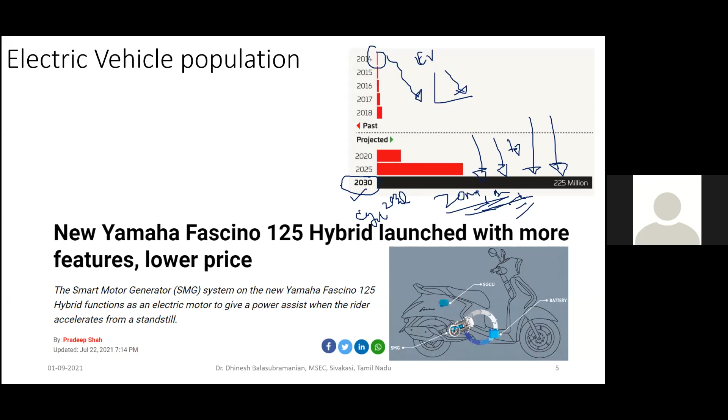Talking about electric population, in the year 2010 most of the vehicles in India was dominated by only purely internal combustion engine. So it was only internal combustion engine ruling the time scale of 2010.

But as the years kept increasing, the role of internal combustion engine slowly started to lose its market space in the overall two-wheeler and four-wheeler sectors. Particularly by the year end of 2020 or later, the slope would face a drastic change after this time scale.

So after this, only the internal combustion engine will be replaced by the term HV or PHEV. HV stands for hybrid vehicle, whereas PHEV stands for plug-in hybrid vehicle.

So by the year 2021 or later, you can see the internal combustion engine will only be alive by the term HV or PHEV. So we will discuss more about these two terms in the upcoming slides.

Agreeing well with this profile pattern, the new Yamaha Fascino 125 Hybrid was launched with more features and lower cost. This was the news on July 22, 2021, not too far from today's date. Earlier it was a purely internal combustion engine based two-wheeler, mainly making use of petrol for its propulsion, but they have come up with a new term and tried to add 'hybrid' to this vehicle, claiming it is a hybrid vehicle variant of the existing model.

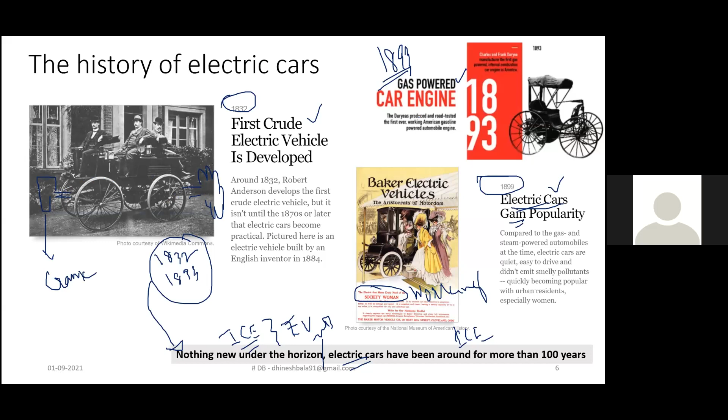If you think about the internal combustion engine at that time scale, you needed to have a crank in the front, and whatever emission emitted from the rear side would be enormously high. So society women or working women highly preferred electric cars rather than internal combustion engines at that point of time.

Later on, in 1901, Edison took on the electric vehicle with batteries. So now people are discussing Tata Nexon with an electric vehicle or pure EV, but the electric vehicle with batteries was introduced in the time scale of the earlier 20th century.

It was in 1901, but as of now we are in 2021. So think about the time scale - for nearly 120 years, people were only discussing the internal combustion engine.

It was in 1901 that the first hybrid electric cars were introduced. As discussed in the previous slide, Fascino has come up with the statement that they are just coming up with a hybrid vehicle variant by 2021, but the hybrid vehicle was introduced to mankind at the time scale of 1901.

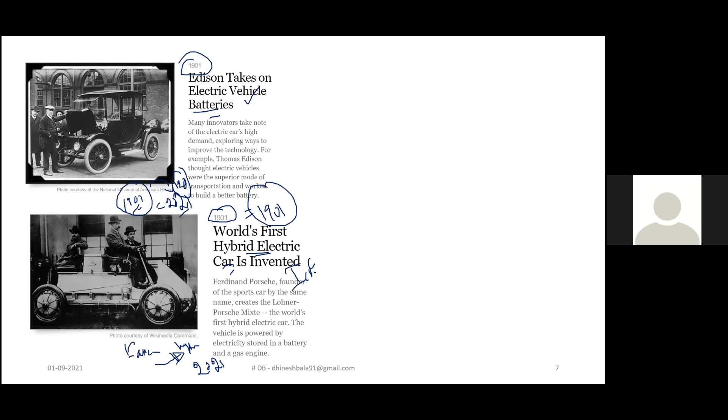So for the past 100 years, only the internal combustion engine was ruling the entire automotive market field. It was from 1920 to 1935 that the electric vehicle slowly started to fail to take a place in the automotive market share. The one main reason people addressed at that point of time was the charging station facility and the overall weight of the system.

The overall weight of the system at that time, talking about the battery, was enormously high, and the charging time and the amount of power that could be drained from the battery was not sufficient to make long travel, particularly for transportation. This made the role of electric vehicles in the automotive share slowly disappear entirely. This happened in the time scale of 1920 to 1935.

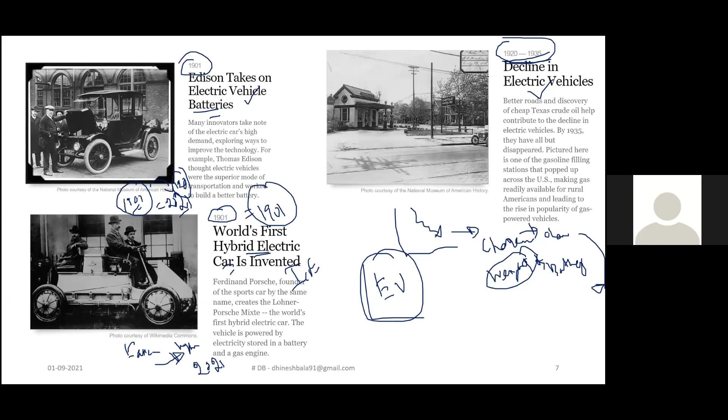But once again, electric vehicles started to make a small role in the automotive share, particularly in the time scale of 1968 to 1973. This happened because gas prices started to rise to a drastic extent. The dependency on gas price, or the dependency on fuel, was focused on one particular nation rather than having multiple supply points.

This made gas one major threat to the entire automotive field, particularly the internal combustion engine. The dependency of gas focusing on one particular nation made an issue with the ruling nation at that time. So, as the gas price kept increasing and the dependency on one particular nation continued, this paved a pathway for researchers all over the world to think of an alternate source of energy rather than relying on gas as the main energy source.

This was well assured in 1971 as the electric vehicle was once again in the newspaper and in the air, as the NASA lunar rover was propelled with an electricity-based vehicle at that time. This news sparked among all the automotive manufacturers to think of making use of electricity as an alternate energy source rather than relying on existing petrol and gas.

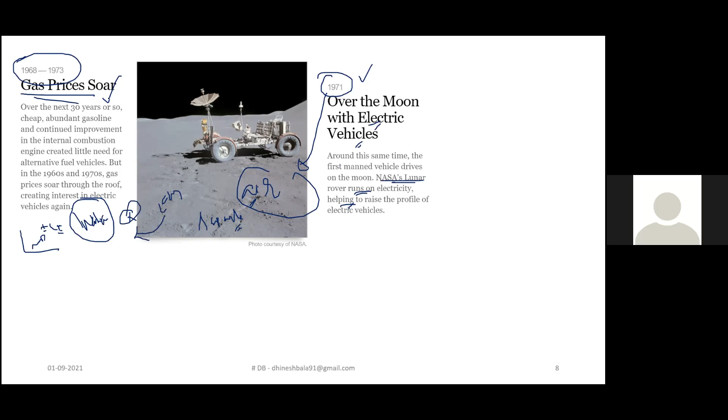It was also well assured by 1973 that the next generation electric vehicle prototype was introduced to mankind. General Motors developed a prototype for an urban electric car, and it was displayed in a symposium where most automotive manufacturers gathered, the symposium of low pollution power systems, in 1973.

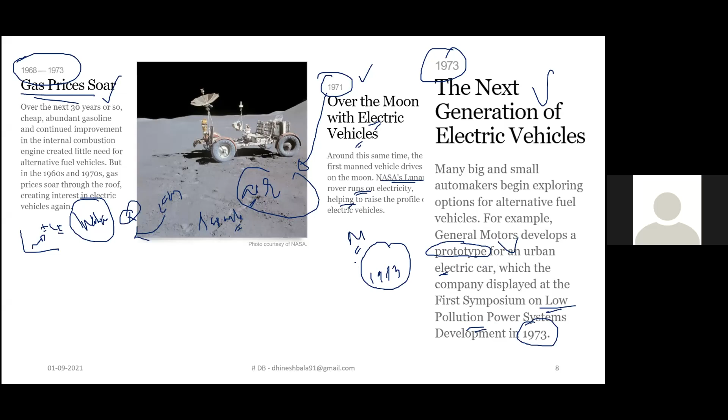Once again, the electric vehicle started to emerge in the mid-1970s, and the first hybrid vehicle was introduced to mankind. The invention of the hybrid vehicle was in 1901, and it was in 2000 where Toyota Prius came up with the first mass production of a hybrid vehicle.

For the past 100 years, people were relying purely on internal combustion engines propelled by either petrol or diesel as an energy source. And here comes the hero of our current electric vehicle era: in 2006, the Silicon Valley based startup entered the automotive market, making automotive manufacturers want to have their own electric vehicle once this statement was out.

Tesla was initially a Silicon Valley based startup. They announced that they would produce a luxury electric sports car with a range of 200 plus miles. This was far-fetched at that time, and it made a threat to most automotive manufacturers, who then accelerated their efforts to work on their own electric vehicles.

This particular year marked when the role of electric vehicles slowly started to gain penetration in the overall automotive makers' share percentage worldwide. And this covers the history of the electric vehicle.

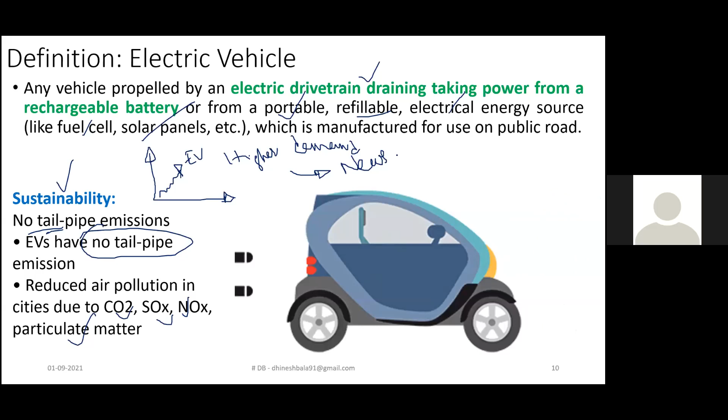This would result in higher demand in electricity, and sooner or later you might get news stating that the government would announce much more incentives for installing solar stations on the rooftops of your houses. To handle this electricity demand, the government should rely on an alternate energy source, because whatever electricity is produced as of now is handled by power plants, either thermal or any other power plant. So once electric vehicle penetration increases, this would put an enormous pressure on the demand for electricity.

So all put together, it would have a great impact on the power plant to produce excess electricity. And for producing excess electricity, once again, you should rely on fossil fuel. So talking about no tailpipe emission, it should be addressed with one particular term along with it: no tailpipe emission from the user end. Once electric vehicle penetration has increased, whatever emission comes from your particular vehicle would be restricted.

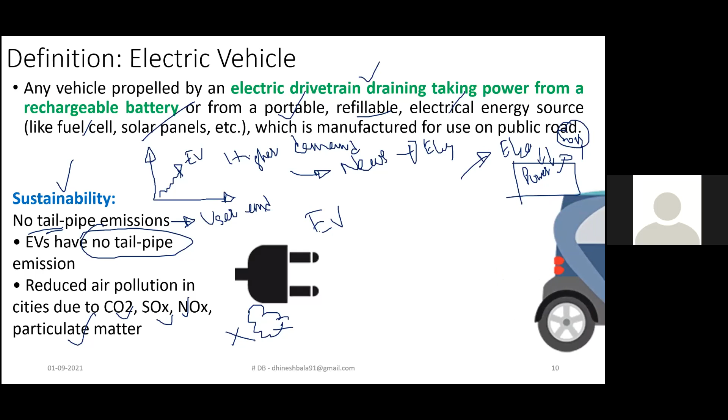But to handle this electricity demand, the thermal power plant should run for an excess time and handle the overall demand. So the fossil fuel supply to the thermal power plant would increase, and the thermal power plant would emit excess emission, whereas the vehicle used by yourself won't emit emission. So it doesn't mean that switching over to an electric vehicle would completely cut away the emission. Emission from the user end would be cut down to the maximum percentage, but the emission from the thermal power plant would be enhanced to a higher level.

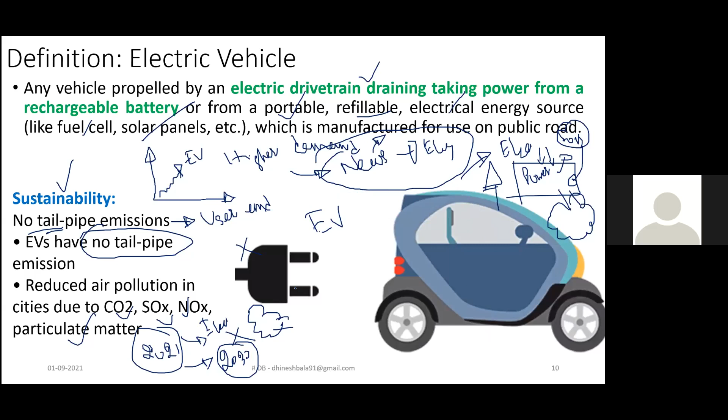So that is why we expect that sooner or later there will be news stating that we will have certain incentives to install a solar panel based rooftop setup to create our own electricity to handle the future demand, because we are in the year 2020-2021, and we are expecting a huge penetration of EVs by 2030. So to handle that demand in the near future, we should rely on an alternate source of energy to produce electricity. That is going to be the major threat in the upcoming years.

Talking about the battery powered electric vehicle and hybrid electric vehicle. The battery powered electric vehicle possesses some advantages over the conventional ICE, such as high energy efficiency and zero environmental pollution, particularly from the user end, that is from yourself, and not from the overall objective. However, the performance, especially the operation range per battery charge, is far less compared to IC engine vehicles. That is one great disadvantage why the penetration is not too high even at this point of time. Extensive research is running on this, due to the much lower energy density of the battery than that of gasoline.

Talking about hybrid vehicles: because a huge amount of investment has been carried out in internal combustion engine based industries and their related industries, you can't completely eradicate the internal combustion engine and move over to EVs at this point of time, because there would be a great loss for this sector. So to keep the internal combustion engine alive, they have come up with a hybrid engine, which makes use of two power sources.

So you will have the existing internal combustion engine, and along with that, the combination of electric motor and battery. This would be the primary, and this would be the secondary. Primary and secondary means the maximum percentage would be handled by the internal combustion engine: 51% of the energy share by the internal combustion engine, and 49% by the electric motor and battery combination. So the primary and secondary power sources are combined, having the advantages of both internal combustion engine and EV to handle each other's disadvantages.

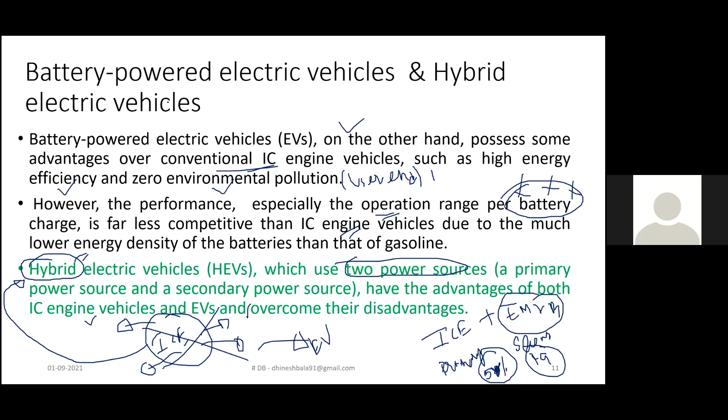So these are the future vehicles which are going to rule the world after 2050 or later. But till 2050, you can be assured that the internal combustion engine will be alive, but only by the name of hybrid vehicle. And even by the name of hybrid vehicle, the primary source would be only the internal combustion engine. So we'll understand this much better in the upcoming slides anyhow.

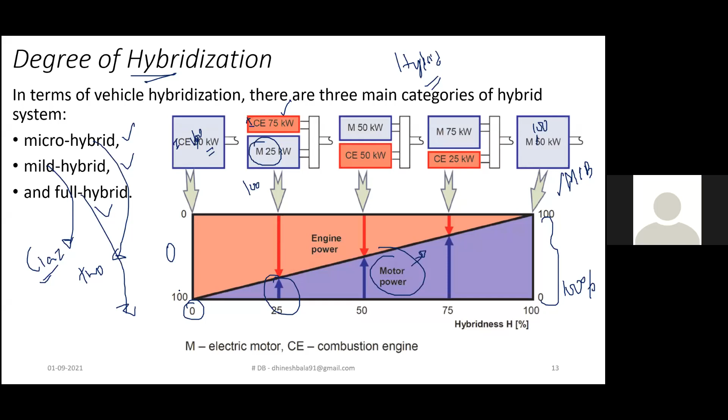So you might have seen various vehicles as of now. Maruti Ciaz is a mild hybrid, and the two-wheelers and four-wheelers are micro hybrid, and you might have seen variants coming with full hybrid. So most of the vehicles, particularly four-wheelers, are coining themselves as hybrid vehicles based on this strategy with respect to the degree of hybridization. We'll explore more about this in the upcoming slide. So what is this degree of hybridization?

So first let us start with the micro hybrid. You can see the overall power would be handled by the internal combustion engine and motor. In this case, the motor would only be utilized for the start and stop operation. You can see most of the two-wheelers as of now don't have a kickstart option. I think the kickstart option in the vehicle has been completely eradicated. So you will only have a power start option. This power start option is known as the micro hybrid.

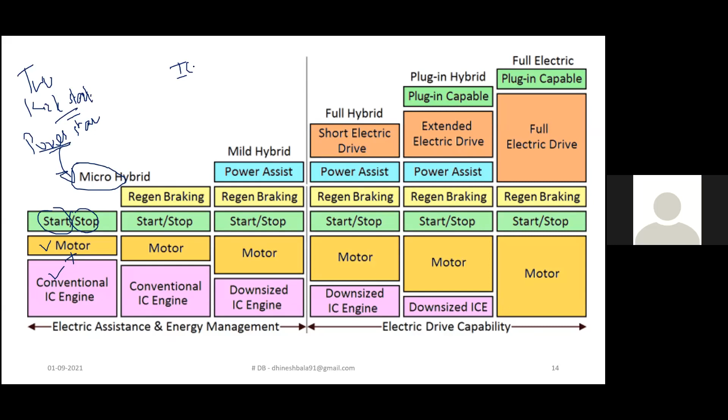It says that in the existing internal combustion engine, you will have a motor plus battery combination, and this motor would be utilized just for starting and stopping your vehicle. So all the two-wheelers as of now in the market fall under the category of micro hybrid. It is just an add-on fitted to your existing internal combustion engine. They remove the kickstart option and make use of a motor to start your vehicle. So this case talks about the micro hybrid.

This micro hybrid has one additional option: you have the existing internal combustion engine and motor, and this motor combination is used for start and stop operation. Apart from that, you can effectively use it for regenerative braking. I hope you are aware of regenerative braking. It means effectively using the waste energy and converting it into electricity. At the time of braking, the unwanted kinetic energy produces electricity, and that can be effectively used to charge your battery.

So talking about micro hybrid, it would be a combination of internal combustion engine and a motor. And when talking about micro hybrid, there won't be any major change in your vehicle. They will just have an add-on device that is fit with your existing internal combustion engine, and that motor would be effectively used for only two major operations. One is start and stop. So that is nothing but our power start option.

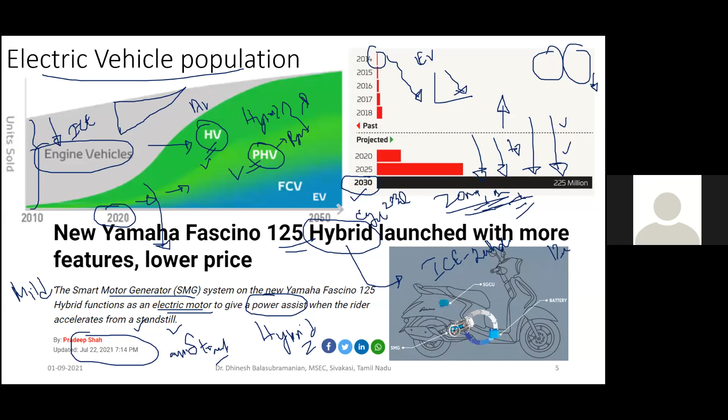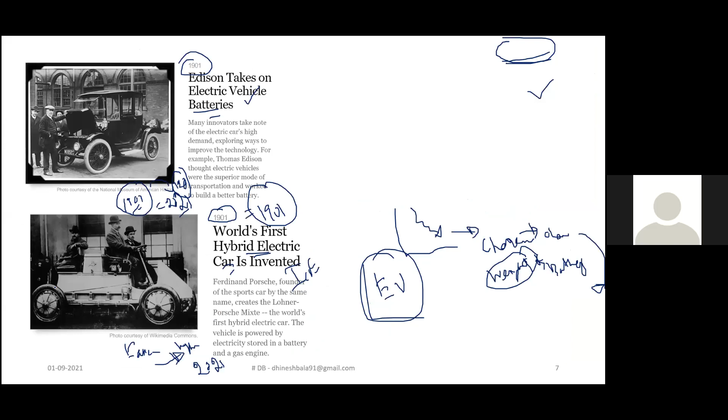And at this particular point of time, you should see a term known as engine downsize. So you should be very clear about why the engine needs to be downsized. Say you have an existing vehicle with a mass of around 400 kg, and you have been asked to convert it into a hybrid vehicle. You are going to add a motor plus battery to this existing system.

So let us assume all put together, the overall weight of the system would increase to 600 kg. For an assumption, motor plus battery weighs around 200 kg. So the overall weight of the system becomes 600 kg. If the overall weight of the system increases, then the fuel consumption would increase. So our main objective is we need to get a better advantage when switching over to the hybrid vehicle mode.

So as you convert your vehicle into hybrid vehicle mode, what you have to do is downsize the engine and reduce the overall weight of the system. Unless you reduce the weight of the system, you won't enjoy the advantage of converting your vehicle into a hybrid vehicle variant. So that is the reason why you can see the overall size of the internal combustion engine has been reduced. We'll try to understand how the engine is downsized in the later slides.

But the term downsize has been added in this case because of this particular weight issue. Once the weight increases, the fuel consumption would increase, and you won't enjoy the advantage of hybrid vehicle mode.

And talking about full hybrid, even in full hybrid, the role of the motor plus the related components would not exceed 49% of the power delivered. The maximum percentage would be handled by the internal combustion engine, because the internal combustion engine would be the primary source and the motor would be the secondary source.

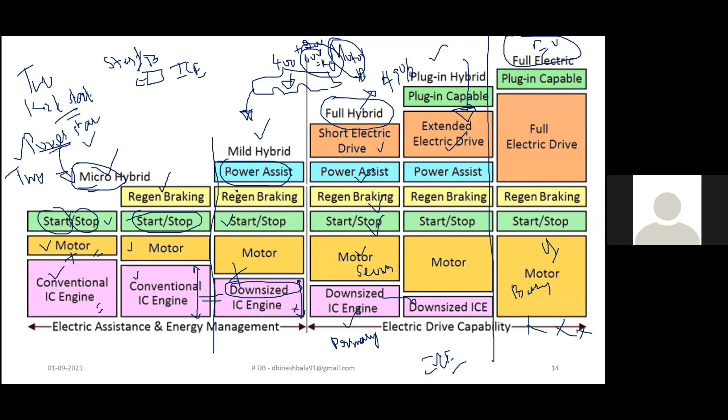So further in this advancement, rather than focusing on battery, people have started to explore different options of ultracapacitor or fuel cell based vehicles or solar energy to produce electricity. So this is the current conversion of your existing internal combustion engine into hybrid mode, and from hybrid mode to electric vehicle. This would be alive for the next 20 to 30 years, because there is a huge amount of investment and dependency on pure internal combustion engines.

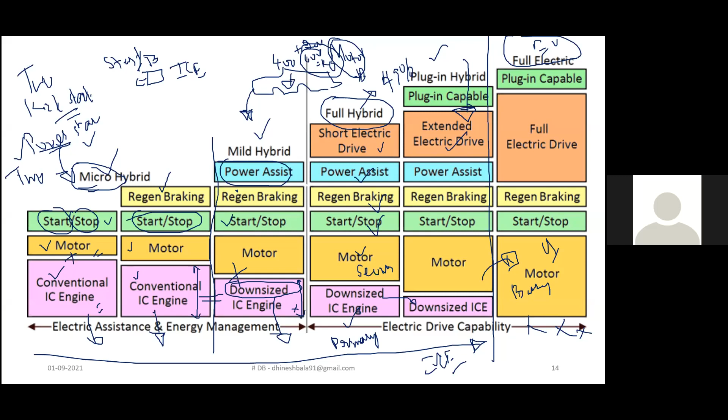But it won't be able to sustain after 2050, and after 2050 people would completely switch over to electric vehicles. But at that particular point of time, we need to think about how the electricity would be produced to handle the huge demand which we are going to face in the near future. I hope you are able to clearly understand the difference between electric and hybrid vehicles and their classification.

And talking about hybrid vehicle technology, this has been addressed in the previous slide, where in terms of micro HEV, the degree of hybridization would be from 5 to 20%. So merely 5 to 20% of the power demand would be delivered from your battery plus motor combination, and it would be effectively used only for start and stop operation. And talking about mild hybrid, it would be 20 to 30% of DOH. DOH stands for degree of hybridization, and for full hybrid, it would be from 30 to 50%.

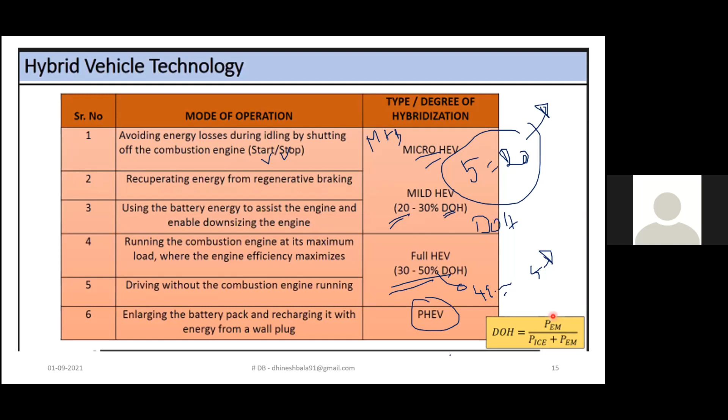It won't be 50; it would be closer to 49%, and the rest would be converted into electric vehicle, and the secondary would be your internal combustion engine. And the last one is plug-in hybrid vehicle. So rather than relying on the power source internally, you can have an external power source to produce electricity. So these are the broad classifications of electric hybrid vehicle technology.

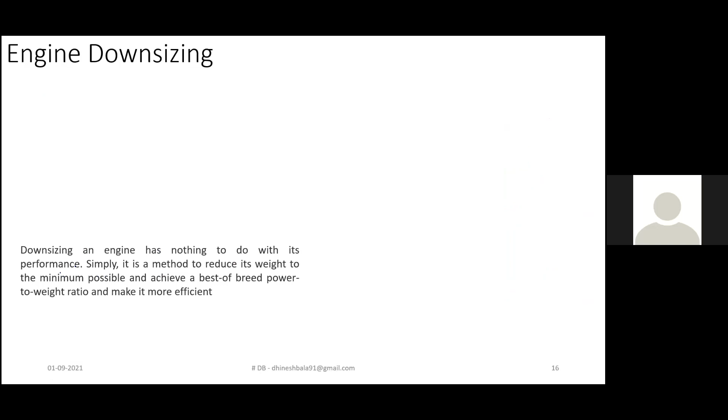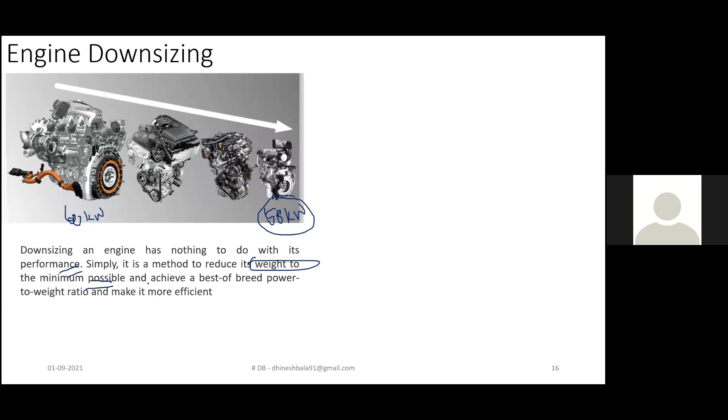And talking about engine downsizing, downsizing an engine has nothing to do with the performance. The existing performance is retained. So let us assume it produces a power of around 60 kilowatt. The downsized engine would more or less produce the same power output, but the overall weight would be effectively reduced. So simply it is the method to reduce the weight to the minimal possible weight to power ratio, the minimal possible way to achieve the best power to weight ratio.

So let us assume it has a weight of around 100 kg, and this would have a weight of around 75 kg. So the overall weight has been reduced drastically, whereas the power is not compromised to a greater extent. So this is what engine downsizing is about. And in most cases, it is now coupled with a turbocharger or a supercharger. So the upcoming vehicles come with turbo or superchargers. Mainly, this will assist you to a greater percentage to reduce the weight and enhance the power output.

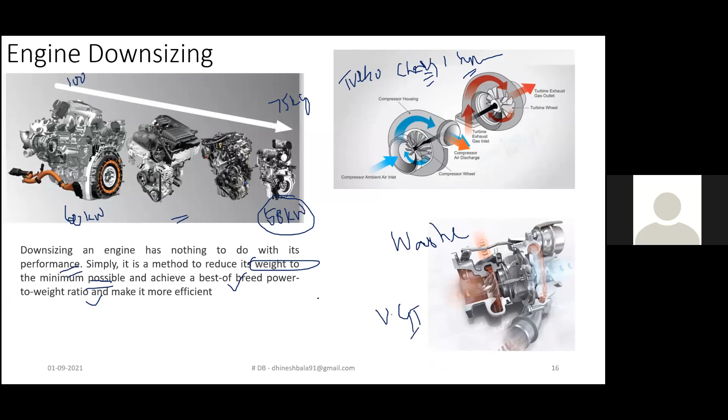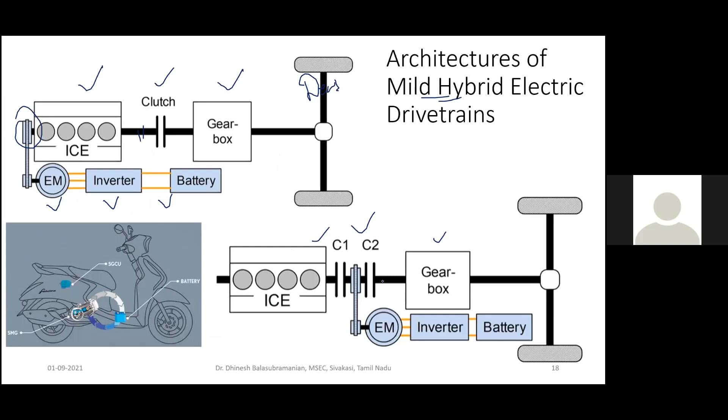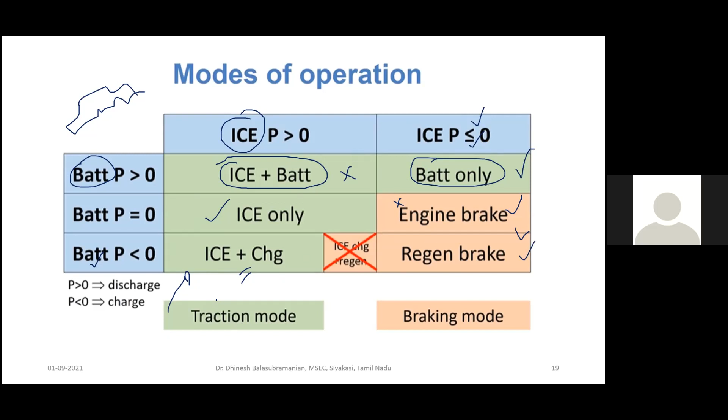And the sandal color or the brown color talks about the braking mode. So at the time of braking, the internal combustion engine power might be lower. So at this point of time, it would be less than zero. And at the time of regenerative braking, the same might happen. So the battery power might be less than zero, or the internal combustion engine power might be less than zero, because only when these two powers are cut off would the regenerative braking be active. So these are the different modes of operation at which the power would flow.

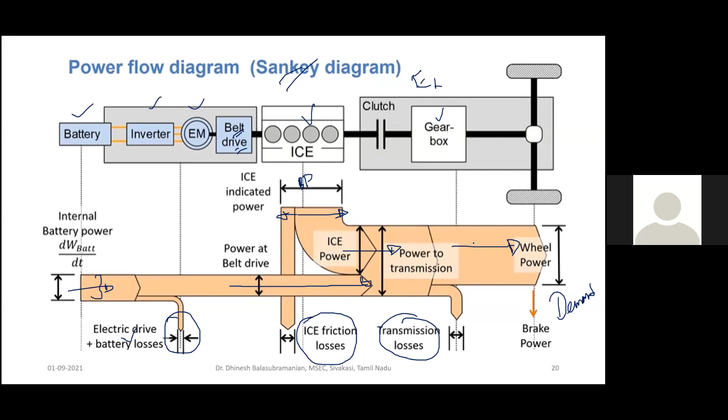When you combine the battery plus electric motor combination to this existing system, this is the overall power delivered from your battery plus electric motor combination, and it gets added to this existing power coupled with the internal combustion engine. At this point, you will have certain driving losses as you are connecting with a belt drive, and this would be assisted to the end wheels by these means. So this is how the overall power flow for a Sankey plot would look like.

Talking about battery-only mode and completely getting rid of the internal combustion engine - as it is a combination of mild hybrid, you will have only 0 to 20% of power delivered from your electric motor combination. So if you make use of this battery-alone mode to handle the end wheel, whatever power is delivered by your electric motor would be very minimal.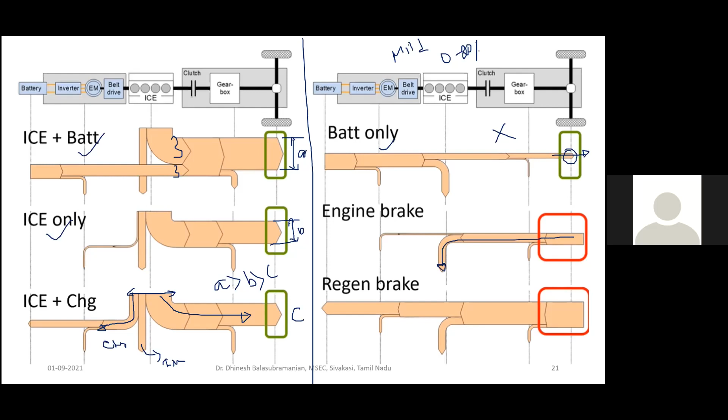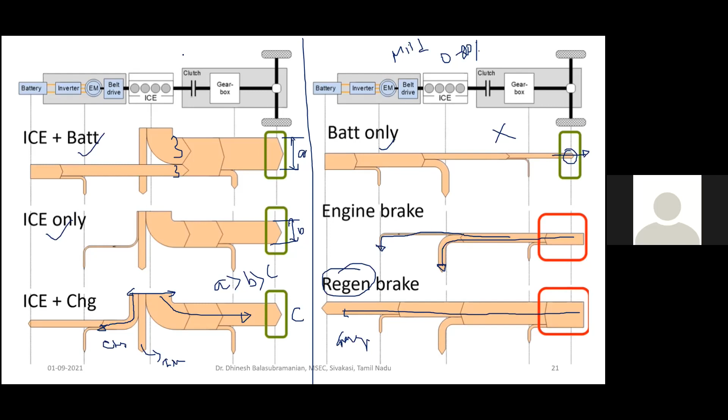At the time of braking, you can see the power would be lost to your internal combustion engine, and there would be very minimal power to the battery, because it is just connected by means of a belt drive. At the time of regenerative braking, you can see an excess amount of energy transferred to charge your battery. So this is the Sankey power flow plot for your internal combustion engine and battery, in brief.

So talking about hybrid vehicle drivetrain, whatever we have discussed talks about the mild hybrid. Moving further in the hybrid vehicle drivetrain, it is further branched out into series hybrid and parallel hybrid.

In case of series hybrid, as in the existing case, you will have a fuel tank and an internal combustion engine. Talking about the electric vehicle part, a battery and an electric motor, and this would be coupled with a transmission system to handle the end wheel demand. So here you can see you are having both internal combustion engine and EV, but this series hybrid is nothing but making use of electrical energy to propel your vehicle.

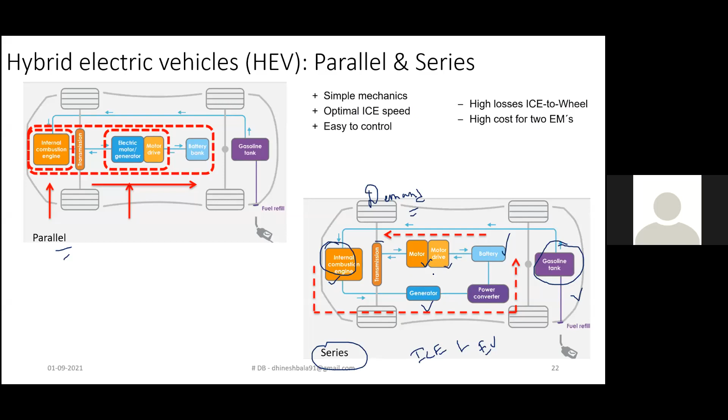So the power flow is in this fashion: from the fuel tank, the power is delivered to your internal combustion engine. From the internal combustion engine, the rotational energy is given to your generator, and that generator will produce electricity, which passes through a power converter, to the battery, from there to the electric motor drive and motor, and that would be supplied to your transmission system.

Similarly, talking about the parallel hybrid drivetrain, you will have the same combination of internal combustion engine and a gasoline tank. Here you can see the fuel tank and the internal combustion engine, and you can also visually see you are having a battery plus electric motor combination. In this case, what actually happens is you connect these two, ICE and EV, in a parallel manner - most often this is a mechanical coupling.

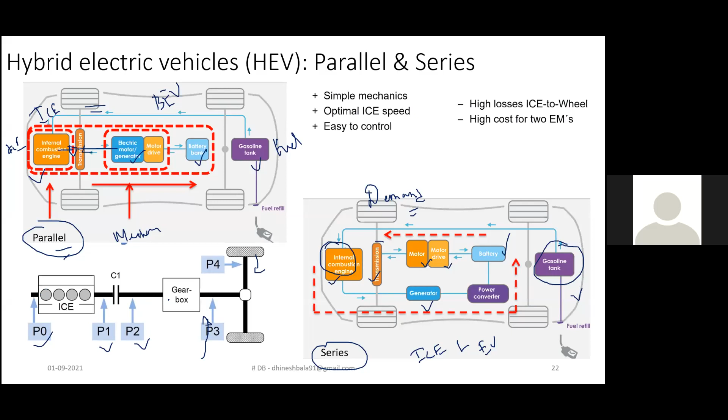So the power would be delivered simultaneously from internal combustion engine and battery in a parallel manner. It can be coupled in either before the engine or before the clutch, before the gearbox, or at the end wheels, or after the gearbox. There are different combinations which you can try to place this.

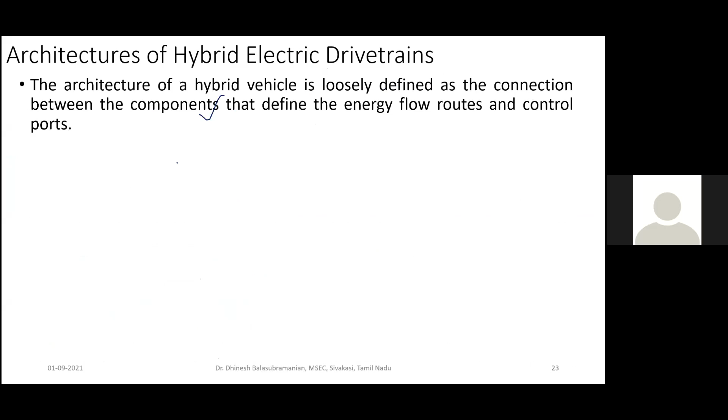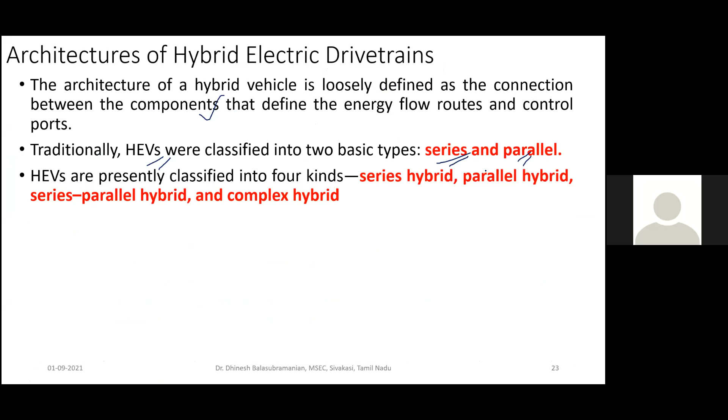In your existing engine combination, talking about the hybrid vehicle drivetrain, the architecture of hybrid vehicle is loosely defined on the connection between the components that define the energy flow routes and the control ports. Traditionally, the hybrid drivetrain classification is based on series and parallel, further branched out into series-parallel combination and complex hybrid combination.

In case of HEV, there are two kinds of energy flow. Either it can be mechanical energy or electrical energy. This is what talks about the electrical coupling and mechanical coupling.

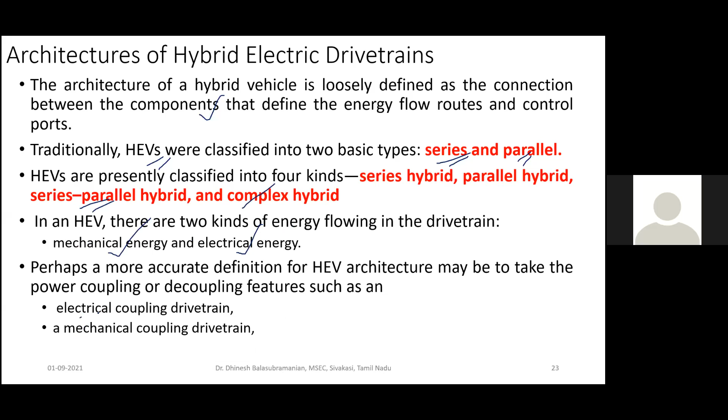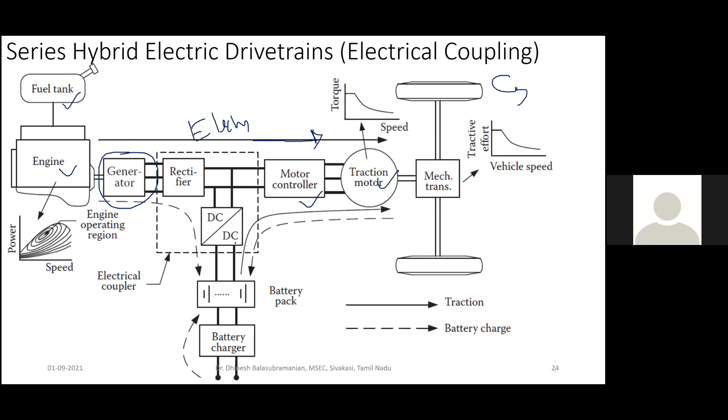Talking about the different Sankey plot for your series hybrid drivetrain, you will have a fuel tank, internal combustion engine. From there, the rotational energy is given to a generator with power electronics, and from there, the electrical energy is allowed to flow through the traction motor, which handles the end wheel demands. Meanwhile, you will also have a battery to do the same, or handle the power to the traction motor. So it would be a simple mechanics, with an optimal IC engine speed and easy to control.

Whereas you will have the same combination as described earlier, you can just run either engine alone mode or battery only mode, or the combination of engine plus battery mode, or you can do the same of engine can deliver certain power to charge your battery and certain power to run your traction motor, or you can just deal with the regenerative braking mode. This could be very much understandable with this particular Sankey plot.

So where you can just see the fuel tank and internal combustion engine. From there, the rotational energy is given to your generator with power electronics, and this power could be delivered to your traction motor and thus would handle the end wheel demands. In this particular case, it is able to run only in internal combustion engine mode, where you can just see the power flow is from the internal combustion engine to the traction motor, and it is an electrical coupling part.

Either it can be pure electric vehicle mode, where the battery would deliver the power to your traction motor to deliver your end wheel demand, or it would be the combination of both, that is the hybrid drivetrain mode, where the power would be delivered from your internal combustion engine and from your battery to handle the end wheel demand. This is the IC engine plus battery charging case, where certain amount of power would be delivered from your internal combustion engine to handle the end wheel demand.

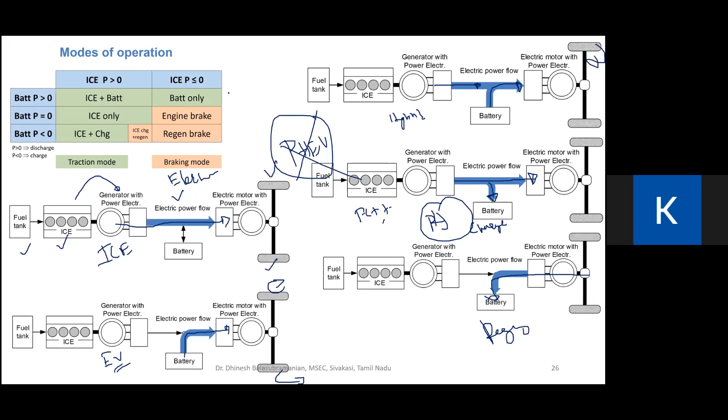Among that, a minimal amount of power would be effectively used to charge your battery, which doesn't have a plug-in option. We are not as of now talking about the plug-in hybrid drivetrain. In case of regenerative braking, from the end wheels, the power would be effectively used to charge your battery. So these are the different modes at which your series hybrid drivetrain power flow would happen.

Talking about the parallel hybrid drivetrain, where we will be trying to couple both the power from internal combustion engine and battery using a mechanical coupling. You'll have an internal combustion engine, clutch and gearbox. The power would be combined with your battery, inverter and electric motor by making use of a mechanical coupler, and that would supply to your end wheels to handle the end wheel demand.

This particular battery and electric motor can be placed at different positions according to the particular requirement. Either it can be placed before the engine, or after the engine that is before the clutch, and in between the clutch and the gearbox, and it can be at the end wheels or after the gearbox. So the word parallel refers to the fact that the torque of electric machine is added to the torque of internal combustion engine, and the total torque propels the end wheels.

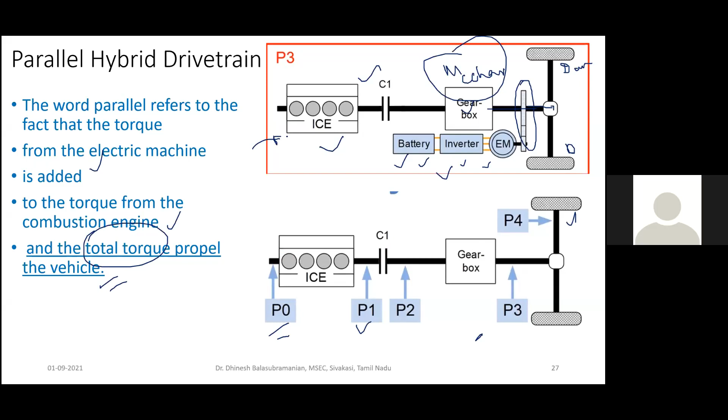So here it is, dealing with a mechanical coupling where both the torque from the internal combustion engine and electric motor are combined together to handle the end wheel demand. This is the configuration for your parallel hybrid drivetrain, where you can see fuel tank, engine, battery, electric control, and traction motor. Here you have a mechanical coupler, which is more or less often an epicyclic gear train, and from there, by means of a mechanical transmission, it deals with the end wheel demand.

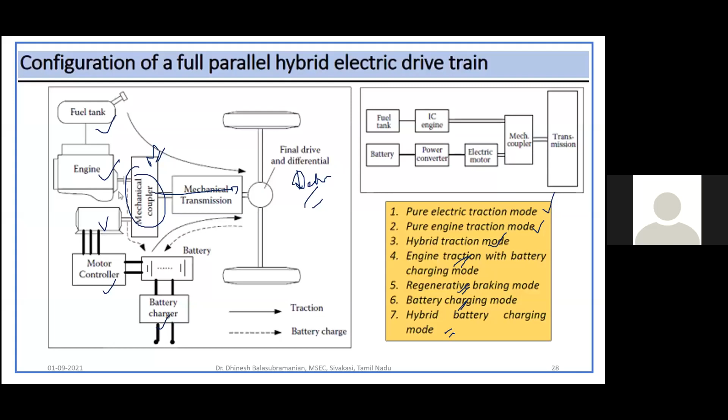This also falls under different modes: either pure electric traction mode, pure engine mode, hybrid vehicle mode, engine traction with battery charging, regenerative braking battery charging, or hybrid battery charging mode. These are the different modes at which your parallel hybrid drivetrain would be running.

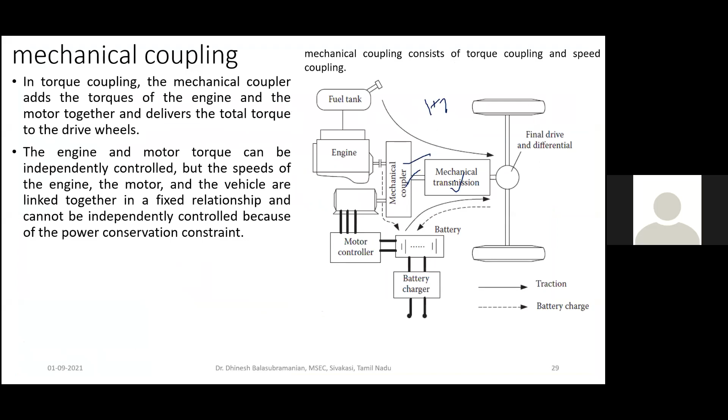Talking about the mechanical coupling, in most cases we make use of an epicyclic gear train to combine these two energies into one single unit. So, focusing on time, I will move forward.

Talking about the Sankey plot for this particular case, I have tried to place the power flow between the differential and the gearbox, considering the internal combustion engine and battery. This is the power flow for a hybrid vehicle drivetrain making use of parallel combination. Talking about internal combustion engine plus battery, this would be the overall power able to be delivered, noted down as A. If it is pure internal combustion engine, a certain amount of power would be used for charging, so as described earlier, the overall power would be in this particular fashion.

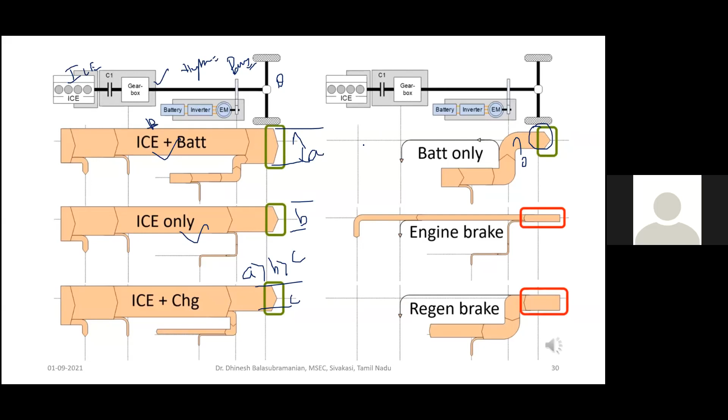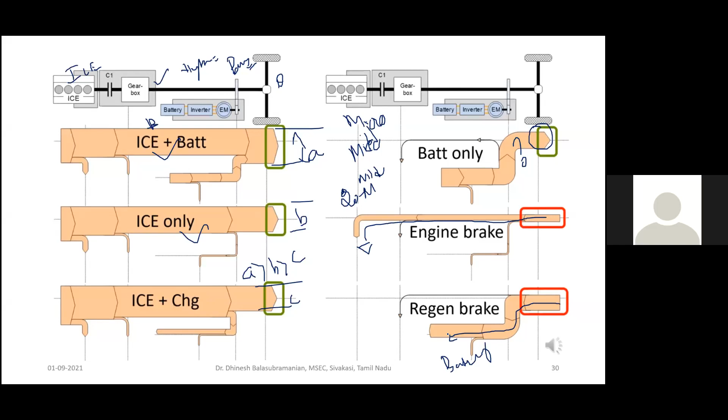Talking about the battery, compared to the previous case, the power of the battery would be somewhat higher than the mild hybrid. So when talking about series and parallel hybrid, it would fall under the category of either full hybrid or mild hybrid. Whatever power is delivered by means of micro hybrid would be very minimal, and by means of braking, the power would be retrieved back to the internal combustion engine. Discussing regenerative braking, maximum power can be effectively used to charge your battery. So this is the Sankey plot for your parallel hybrid drivetrain.

Talking about the real-time application of the series-parallel combination in the automotive market: both series and parallel are old school concepts, so they are not commonly used effectively for vehicle production. Instead, manufacturers make use of the combination of both series and parallel into one single unit.

What the combination of series and parallel talks about is: in case of series, the rotational energy from your engine is transferred to a generator, and that electrical energy is effectively used to run the traction motor. Talking about parallel hybrid, both energies are coupled into a single unit, and that handles the end wheel demand.

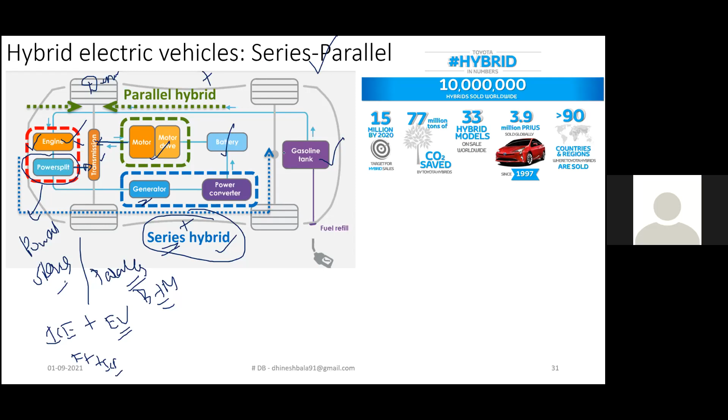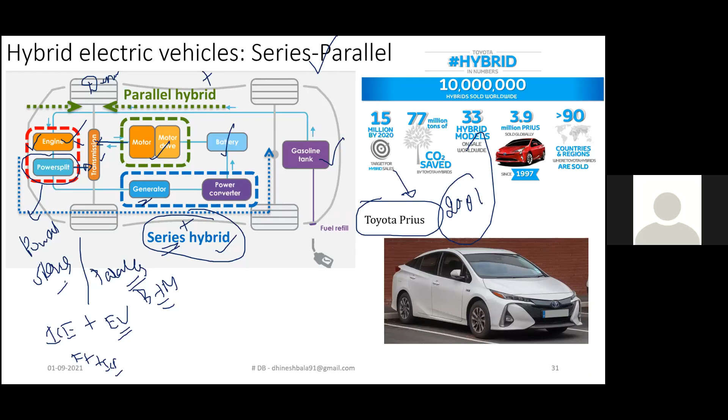So this power split device incorporation would convert your existing system into a series and parallel hybrid configuration. And even complex configurations will have much more complex architecture, and I'm not focusing more on it. And this series and parallel hybrid configuration is what is used in the Toyota Prius. As described earlier in the history, it was one of the highly mass-produced hybrid vehicles in the early 21st century. And the Toyota Prius makes use of the series and parallel hybrid configuration.

And talking about the plug-in hybrid drivetrain, apart from the existing scenario, you will have an additional onboard charging point to charge your vehicle. So this is a pictorial representation of a parallel hybrid drivetrain where you can have an internal combustion engine whose power would be delivered to your transmission, or battery plus electric motor, which would be able to deliver the power to your transmission. And this plug-in hybrid drivetrain in terms of parallel is effectively used for the Chevy Volt vehicle, which makes use of a plug-in hybrid drivetrain with a combination of parallel hybrid drivetrain architecture.

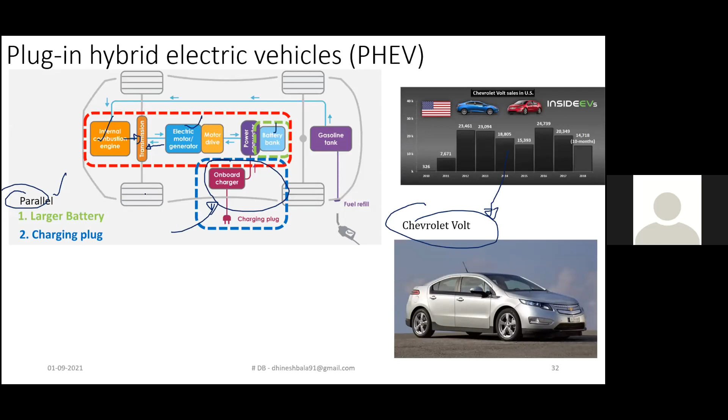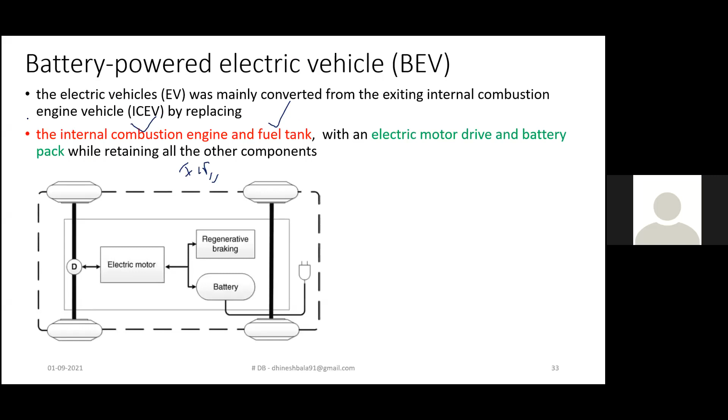And talking about battery-powered electric vehicles, our main scenario is we are going to replace the existing internal combustion engine and the fuel tank in your existing vehicle with an electric motor and a battery. So in the place of the fuel tank, you need to fit a battery, and in the place of your internal combustion engine, you need to put an electric motor. So this talks about the conversion of your existing vehicle into a BEV.

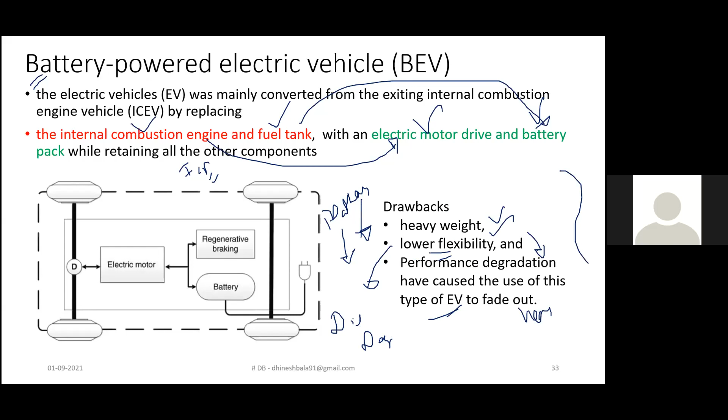So the major disadvantage of this BEV is the weight of the system would be enormously high, because the weight of the battery is higher at this particular point of time. But in later stages, the battery weight would also be reduced to handle this particular issue. And lower flexibility, meaning the varied discharge range of your battery would degrade your battery performance, and that might affect the overall battery usage in the long term. And the performance degradation related to this would cause the use of this type of EV to fade out in the near future. So these are the major disadvantages that would be addressed when talking about BEV.

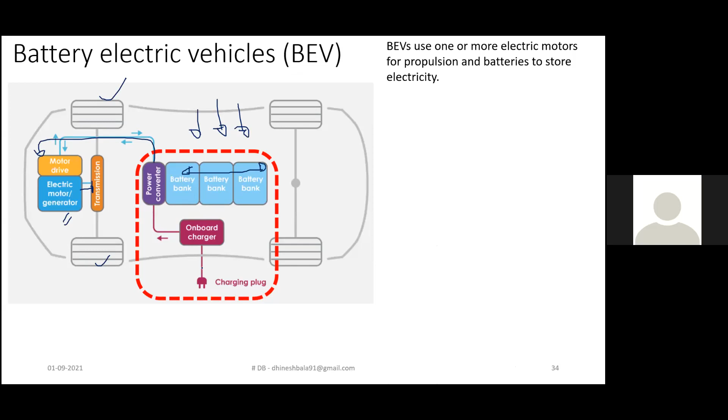And the configuration of BEV has been presented over here. You will have a battery pack, and the overall battery pack would be placed under the footrest of your vehicle, and from there, by means of a power converter, the power would be delivered to your electric motor or generator, and it would be transferred to your transmission system to handle your wheel demands. And you will have an additional option to have plug-in charging. This can be charged either by means of grid electricity at the charging station, or house outlets.

And even if you just purchase any two-wheeler electric vehicle, as of now, they are trying to install their charging port at your household itself to charge your vehicle. And as described earlier in the EV policies, the government is also planning to install charging stations every 3 kilometers or 25 kilometers in and around the highways. And non-grid energy sources such as solar or onboard recuperative energy would handle the demand to a certain percentage. So the BEV can potentially emit zero greenhouse gas emissions, only from the user end, as described earlier.

So the main components present in a BEV would be an accelerator pedal, motor drive control, and the traction electric motor to handle the in-wheel demands. And talking about the power flow, which we have addressed earlier, the ideal performance characteristics required for a power plant have been presented over here. That is, at low speed, we need high torque. And as the speed increases, the torque would slowly fade out. Nominally, in the initial case, the power output would be increasing by a minimal percentage, and we need a constant output for the ideal performance characteristics of a power plant.

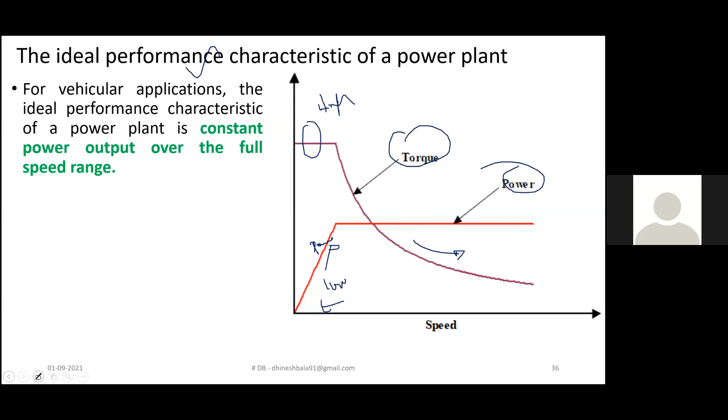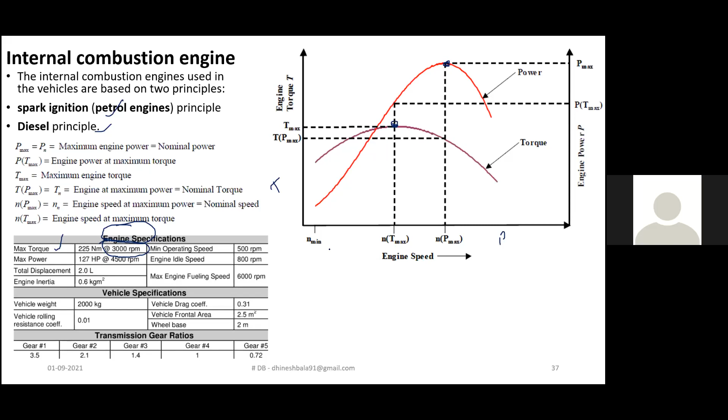And relying on the existing internal combustion engine, here you can see the torque versus speed profile of an ideal internal combustion engine, either petrol or diesel. You can see this particular plot and engine specification stating that the maximum torque is achieved only at one particular RPM, and the maximum power only at one particular point. So whatever the ideal requirement says, that you need high torque at low speed and a constant power output at high speed, that is not actually delivered by your internal combustion engine.

So you might have seen this particular part, that your engine would deliver a maximum torque at one particular RPM and maximum power at one particular RPM. It doesn't mean that you should always run your vehicle at that particular point. That way you will always have an economy zone in your vehicle. This economy zone, or the green color plot in your overall speedometer, says that you will try to run your vehicle closer to the maximum power region.

If you try to run your vehicle closer to the maximum power region, you will get a better power output and a better mileage. That is the reason why you will always get a better mileage when you run your vehicle in the economy zone that is closer to the maximum power point. If you exceed this or fall below the maximum power point, you will be getting a very low power output. So it agrees well with the power plot they have presented over here.

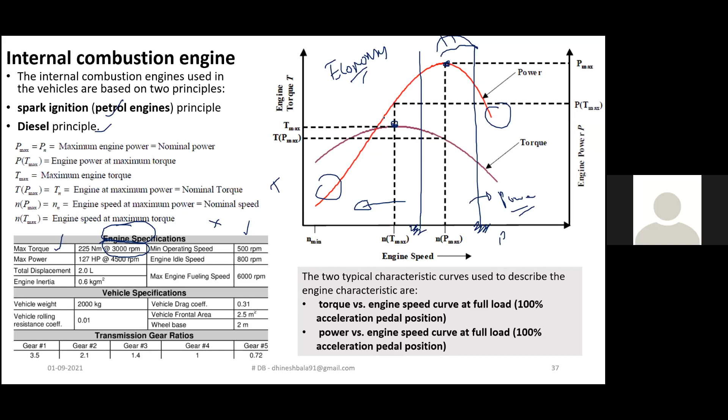Another disadvantage when you are dealing with your internal combustion engine is that it won't be able to deliver a superior torque at low ends. To handle this particular issue, we make use of a gearbox. The role of the gearbox is to fill this particular gap. This is the torque profile of your internal combustion engine, but the torque that we require for an ideal power plant is a high torque. So to fill this in-between gap, we rely on a gearbox in the existing internal combustion engine.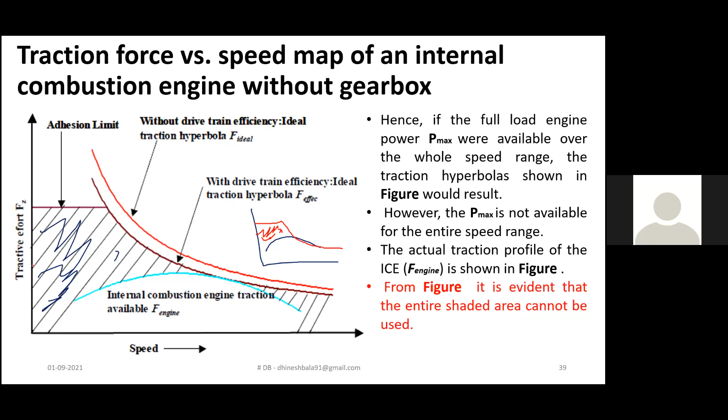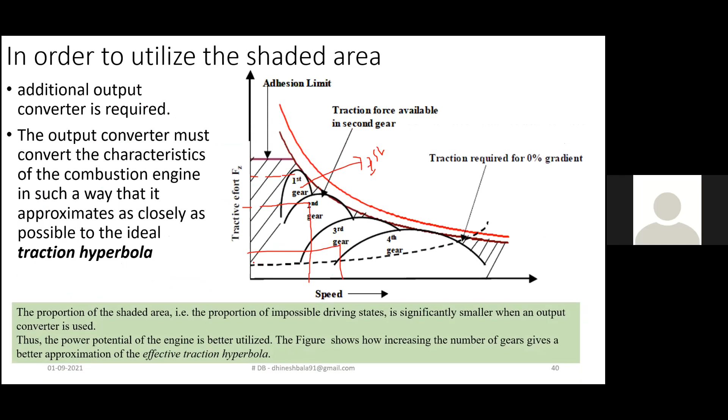When you make a plot for this particular scenario, you can see the profile of first gear, which would be able to deliver a high torque, second gear would deliver a lower torque, third gear even further, and fourth gear is straight drive. So the gap that was raised in the previous case is filled by introducing different gears into the existing system.

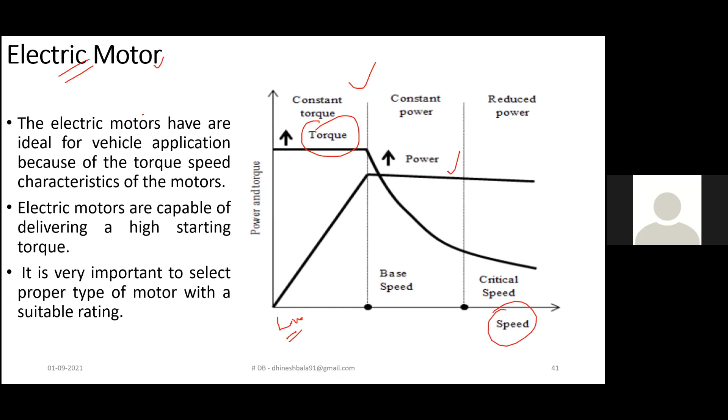The profile of an electric motor agrees well with the profile of your ideal power plant. The electric motor is able to deliver a high torque at low speed and optimal power output at high speed. All put together, the electric motor would be a better option than the internal combustion engine for an ideal power plant. But the electric motors that we use for existing industrial applications can't be directly applied to your vehicle, because those motors would have predefined operating points.

Let us assume a lift coupled with an electric motor for the propulsion. If the lift is able to carry only 1000 kgs, and one additional person gets into it exceeding this weight, you will hear a beep sound, and the overall operating range of your battery gets restricted. Only when you have a weight of 1000 kgs would your lift be operated, so one person would walk away from the lift to compensate for this weight. The optimum predefined operating points are already optimized, and accordingly the battery and motor performance would get increased.

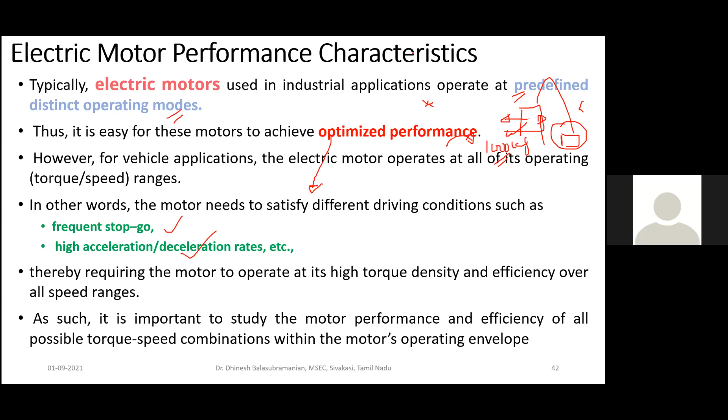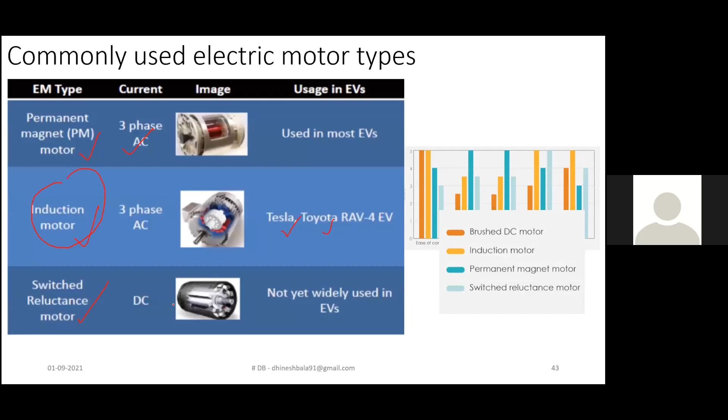Talking about the batteries, as described earlier, the reason batteries play a huge role in the electric vehicle's automotive market share is their weight. In the late or early 19th century, the weight of the battery was enormously high. It would be nearly the weight of an elephant that you needed to carry along with your vehicle to move forward. But as the years progressed, the weight of the battery started to get reduced. In an alternate way, talking about the energy share, the energy share of gasoline from the 19th century to the 20th or 21st century is closer to 12,000 watt hours per kg.

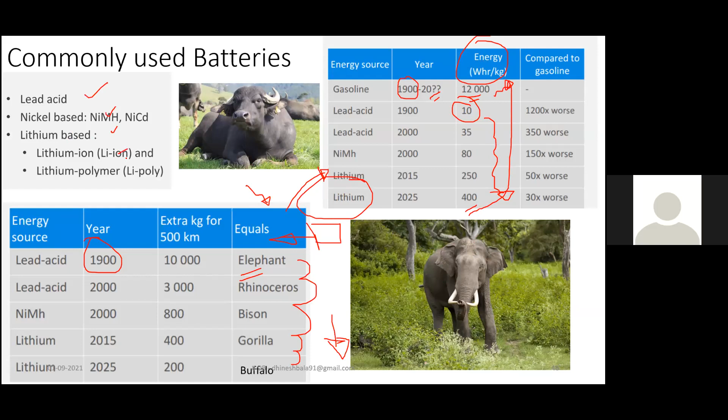But in the early stage, the energy was only 10 watt hour per kg, and it has been keep on increasing at this particular point of time. So it won't be able to get closer to your internal combustion engine energy share, but we can just rely on near future to have a better energy. And as of now, most often cases, we are just relying on lithium-ion batteries for our electric vehicle and our mobile phone and laptop energy usage.

So in late 2015, the overall demand for lithium was not too high, but as the year keep on increasing, the demand for lithium has also started to get enhanced. And particularly as described earlier, by 2030, the overall demand for lithium would face a drastic demand, and that should be dominantly used only for the passenger EV, because as described earlier, by 2030 the vehicle population, particularly electric two-wheeler vehicles, would be higher, and most of the lithium batteries would be effectively used for

your passenger vehicles. And talking about the reserves all over the world for lithium, Chile is having the maximum reserve, followed by Australia and Argentina. And by 2030 or even further, the dependency on lithium would also get a peak, as we have discussed for the gas price. So sooner or later, you might have a presentation like this stating that we may switch over from lithium to a different energy source because of its huge demand by the year 2030 or even later. So extensive research is also running on to find an alternate energy source rather than relying on one single

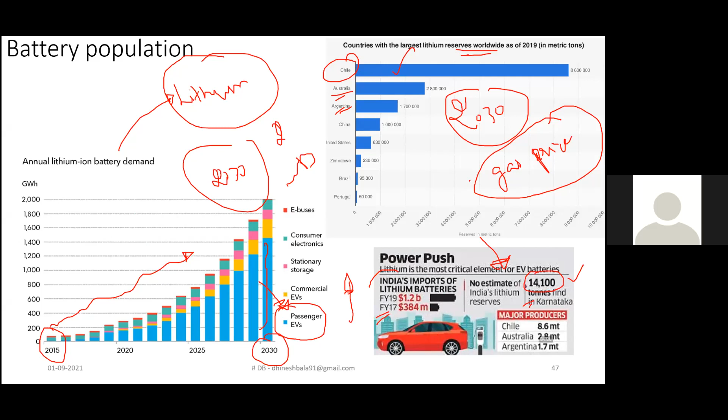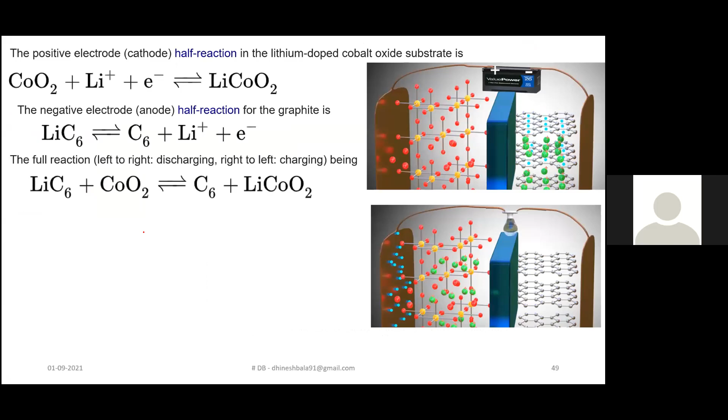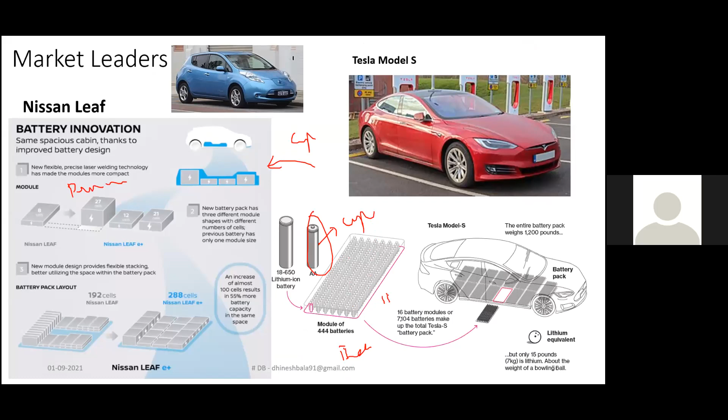And Nissan Leaf makes use of a battery pack of prismatic type, whereas Tesla makes use of a cylindrical type, and they have converted their battery pack into a cylindrical type to handle the heat generation issue. So based on charging and discharging, the battery is allowed to liberate excess amount of heat. So think about your mobile phone. If you just charge your mobile phone and touch the back case, you can feel the sensation of heat. So that is why the manufacturers are suggesting to remove the panel cover and charge your battery. If you place the panel cover and charge your battery, the heat would get insulated, and this heat would completely degrade your battery life and its performance.

And even at the time of discharging, you will face an enormous amount of heat, as the electric motor and battery would be running at different operating conditions. The heat liberation would be enormously high, particularly with the batteries. So that is the reason why Tesla has come up with a cylindrical battery, and it would have a better cooling option. When you are having a prismatic type battery, the area exposed for cooling is highly restricted. So they have overall reduced the battery size, converted into cylindrical, and have a better option for cooling. So under the footrest, they have counted about 7,104 batteries used for the Tesla Model S. So the main reason for reducing the battery size is for effective cooling.

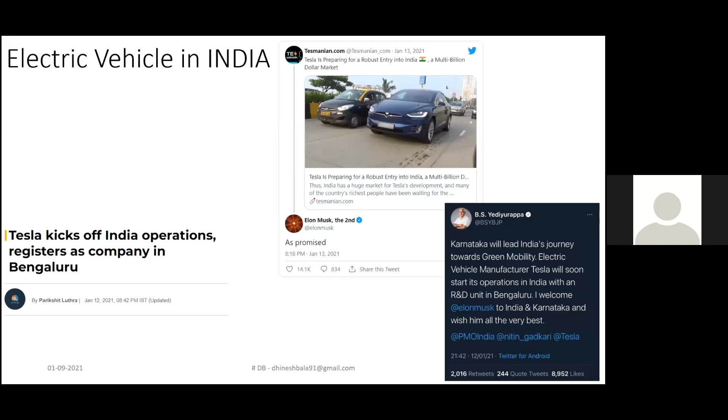And with this, let me just conclude. Now, if you have any further queries, you can just ask us. I hope I didn't bore you much for the past 1 hour. No, sir, it was a very wonderful session. Thank you so much. Now I request participants to ask their queries, any questions.

Sir, one question, sir. Yes, sir. Sir, can you say more on regenerative braking? How is the power actually generated while applying the brake, particularly in electric vehicles? How can it be utilized? Can you throw some light on that, sir?

Regenerative braking. So in case of regenerative braking, what actually happens is the wheel will be rotating in a forward direction, and we will be introducing the brake to it. That is, the friction plate would be added to it, and we'll be restricting the rotating motion. So between this rotating point and the friction contact point, heat would be generated. So what we'll be trying to do at the time of regenerative braking is completely cut off the power source to the end wheels, and we'll be trying to rotate the wheel in the reverse direction.

Okay, sir. So at that time, what actually happens is your motor will be acting as a generator, and all put together, it will put a pressure on your end wheels to reduce the speed, and that would create electricity to charge your battery. How are they making it rotate in the reverse direction, sir, at that point? So you will be asking your motor to get converted into a generator, and that pressure would be acted on your end wheels.

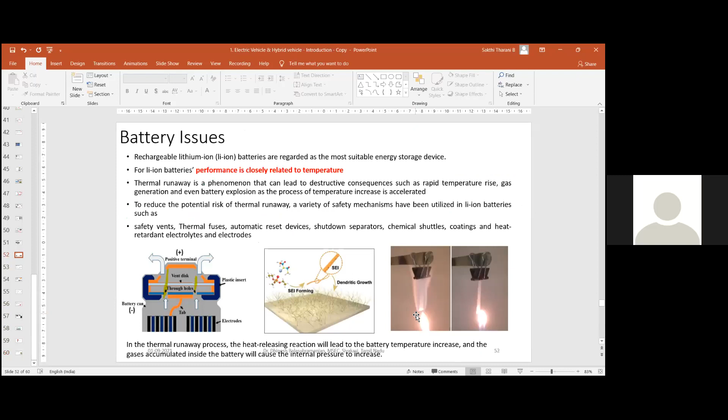So battery fire has pushed Ford and BMW to take a back seat, and Hyundai has recalled all its electric vehicles to focus on this battery fire issue. So a battery fire issue might happen, and that should be much more of a concern when you focus on fast charging. I hope I have answered your question, sir.

I got the point, sir. Okay, whatever life of the battery we are claiming, 3,000 cycles, 4,000 cycles like this, if you go for fast charging, what will be the effect on the life of the battery, sir? Yeah, it would typically affect the life of the battery, sir. It will pull it down nearly 50%, for whatever battery you have in your home.

So think about the mobile phones that your fathers and grandfathers have. They only use them for talking. So the discharge rate is very minimal, and they don't have any add-on applications. But think about the mobile phones that you and your sons have. They have a number of applications, and use them at a very rapid rate. So the discharge rate is high.

So the overall cycle gets affected, and the number of charging cycles increases. All put together will pull down the overall efficiency of your battery to a great extent. But the mobile phones our fathers and grandfathers use have a better cycle compared to ours, because their charging cycles are very minimal and the discharge rate is much lower. So it depends upon the end user's discharge rate or usage.

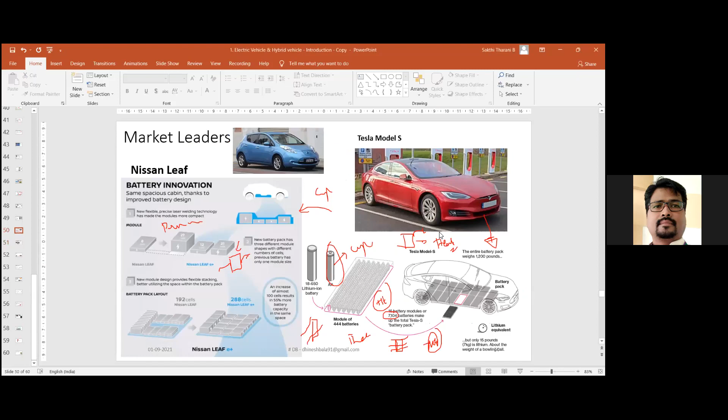What is the actual difference between the prismatic arrangement and the cylindrical arrangement? Arrangement of cells, or what else, sir? Because you clearly explained why we are going for the cylindrical cell type, to dissipate the heat properly or have proper cooling. So what is the exact difference, sir? Prismatic would be in a rectangle shape, sir.

Assume it has an area like this, and when you pass coolant around it, the contact area between the coolant and the battery is a line contact. It would be very minimal. Rather than having one prismatic cell, if you modify this into 10 cylindrical cells and pass a coolant around them, the cylindrical cells will have better cooling compared to the prismatic.

So let us assume this battery is liberating 60 degrees Celsius, and if you use cooling in this particular case, after the coolant the temperature would reduce to 30. But with a cylindrical cell, the temperature might even fall to 20 degrees Celsius. The Tesla Model S has nearly 7,100 cells. The main reason for this amount of cells is better cooling and better interaction between the coolant and the battery cell case.

Because this battery fire issue is a major threat at this point of time, that is why all are converting from the prismatic type. The prismatic type is like the battery in your cell phone. If you see the back case, you will have a rectangular block type. In that, the cooling would not be very efficient. That is the reason, as described earlier, at the time of charging they ask you to remove the panel cover and charge the battery. One of the reasons the battery might burst is this heat insulation.

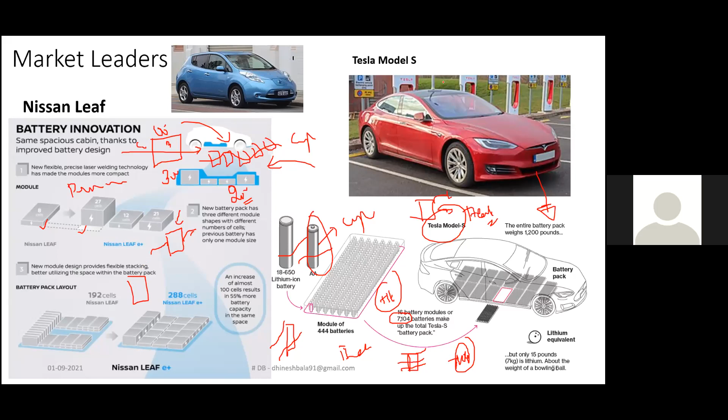Sir, they are just focusing on ultracapacitors, sodium and metal air batteries. Since they are in placement mode today, tomorrow and day after tomorrow, we have suspended all the classes. I request all participants, if they are not asking a question, please mute themselves. There is one question. Yes, please go ahead, sir. Hello. Yes, sir.

Actually, when we go for the hybrid mechanism, when IC engine and electric vehicle both are connected, whether the differential is the same part. In case of IC engine, we consider near about 30 horsepower that we are going to supply. In case of electric vehicle, near about what can be the horsepower? First, what can be the horsepower of this particular unit, getting the shaft power from the IC engine, and whether the differential mechanism will be same as shared there? So how does this work? Talking about mild hybrid, we...

Yes sir, in micro hybrid, we won't change the existing system at all. Just like your internal combustion engine vehicle, you might have purchased a TVS XL which earlier came with a kickstart option, and now it comes with a power start option. Similarly, a Bajaj Pulsar initially came with kickstart and now with power start. So they won't change the overall system. Before the engine, they will try to add this particular composition, and whatever power is delivered by the internal combustion engine will remain the same. But when switching from internal combustion engine to electric vehicle, from micro hybrid to mild or full hybrid, the power should be effectively optimized.